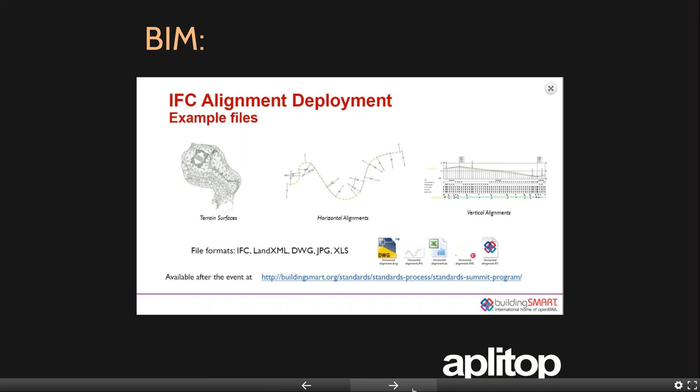What are our current research areas? We have virtual reality, augmented reality, drones, RPS, or BIM for infrastructure, like I told you before.

This is some national reference. Of course, we work with the biggest contractors in Spain, like Sacyr or Dragados and companies like that. Also with universities, the most known universities about surveying engineering.

At the international reference level, we have the underground of New York, the underground of Riyadh. Pan-American is a road that will cross from north to south, all of America. Actually, we are doing Chile and Colombia, the road with tunnel and all these things. Several worldwide projects give us a nice background.

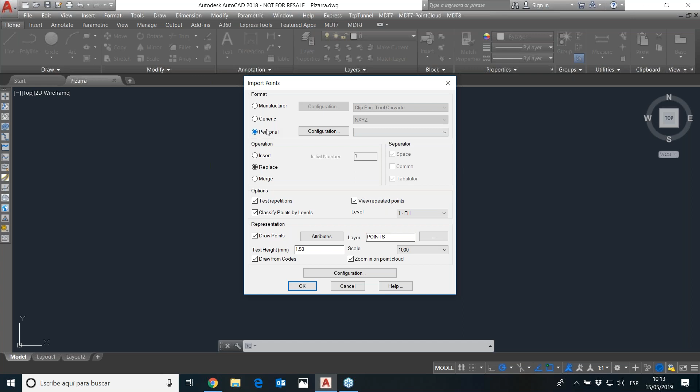So you have several possibilities to import points. You can choose by manufacturer. You can import from Clip, from LandXML, from LAS, from S3, a lot of possibilities. You can make your own personalization about importing points. On our side, for this demonstration, we will do it generically in XYZ for the importation. In some places and different countries, there are several possibilities to change the coordinate system.

Another thing we're going to check: in APLITOP, we don't have any codification established, which is an advantage or not depending on the case. So the first step is to create your own database codification. This way, when you import your points, you will automatically get break lines or representations of trees and this kind of things.

Why is it like that in APLITOP? Because our software is used internationally, the main advantage is you create your own database, and if you travel abroad, you can import it for a local government kind of representation.

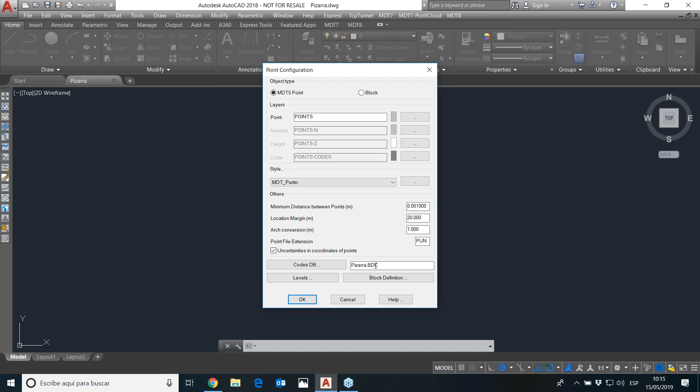So here my codification is for Pizarra. Okay, cancel, I'm going to change the scales, and another important thing is I'm going to draw from the codes that I have taken in the field.

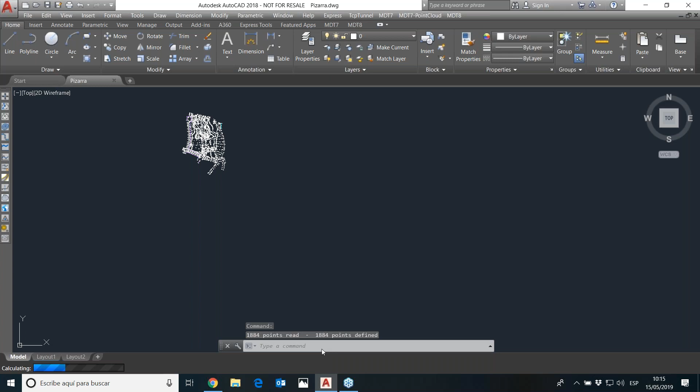I select my text file, and the software is importing all the information of this urbanization. My computer is a laptop, quite old, and I believe it's full. I need to clean it, I was thinking to have time this morning to do it, but it seems quite slow today.

Normally, the software has a really strong and quick calculation process, this is one minute normally, or less. I'm hearing some noise, I don't know why, on the back. Okay, let's close that down.

Brandusa, are you here?

I need to check if I don't have a virus or something like that, because normally it's not calculating this slowly, it's really fast. Okay, so as you can see, we have imported.

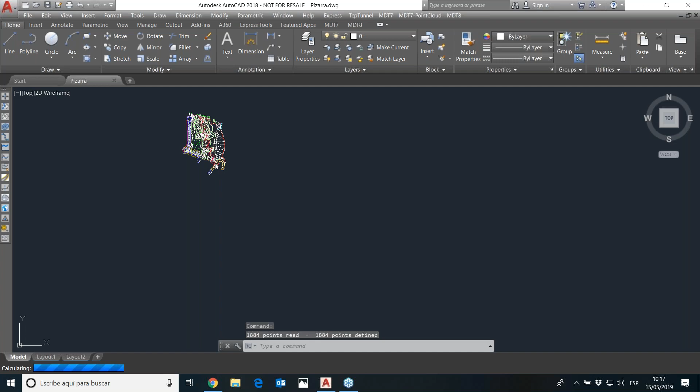1,884 points imported, and all the points have been created with their own codification. As you can see, break lines have also been defined due to the codification, and the software proceeded automatically.

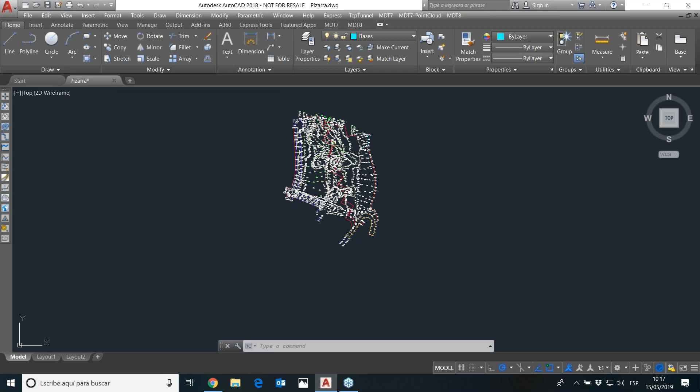So for example, if we go to MDT7 vision, apply, and here you see all the codes. You see, this is to define, and it defines automatically the break lines, when you have been in the field taking your points. These 'árboles' mean tree in Spanish.

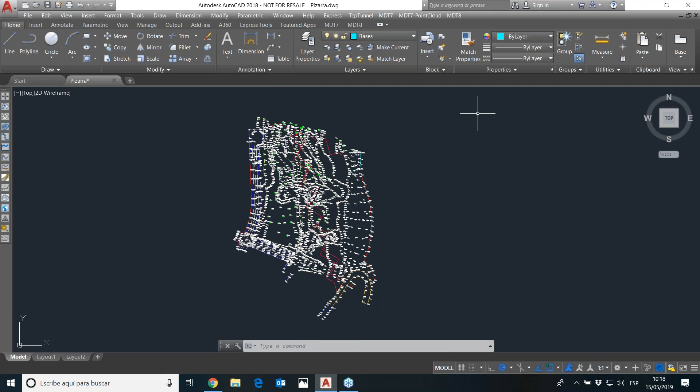So here you can see the points taken in the urbanization where we want to create parcels, and where we want to create a road in order to prepare this urbanization. The first thing we are going to proceed with, since we have all the points, is to create the surface.

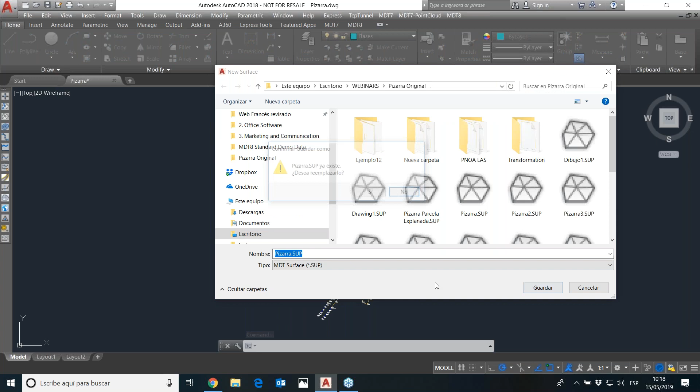It's really easy, we go to surface, create surface, and we choose the triangulation we want. So Pizarra is my superficie, and I'm going to choose the layers that I want to use for my triangulation.

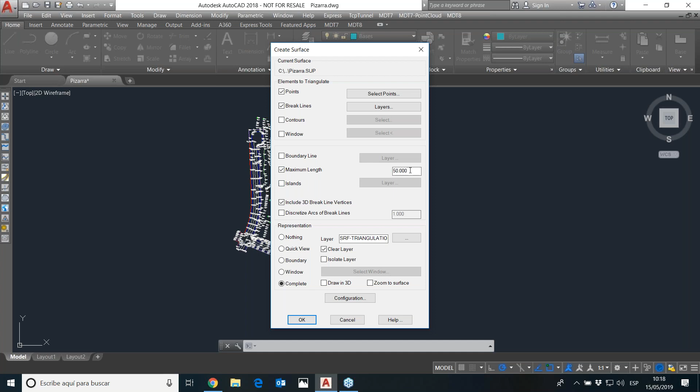I have already prepared this for the webinar, so this is what I want to proceed with for the triangulation. You can select what you want, and you can create islands, and my maximum length, in order to avoid a big triangulation, will be 50 meters. Okay, let's go.

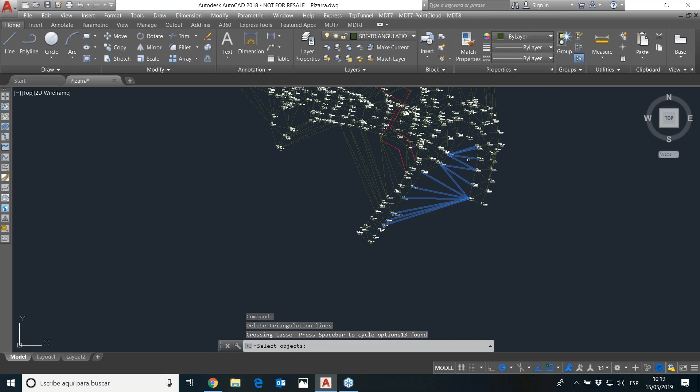So already we get the triangulation, you see that, and for example, there are parts that we don't like. There are several tools in surfaces in order to delete lines, for example, or this kind of thing. So I'm going to delete a line. There are a lot of really interesting tools.

To analyze how the terrain is, for example, we can make a quick profile to have a quick look at how the superficie is, and we get the quick profile. We can change the vertical factor, we can import, we can save, there are several things possible.

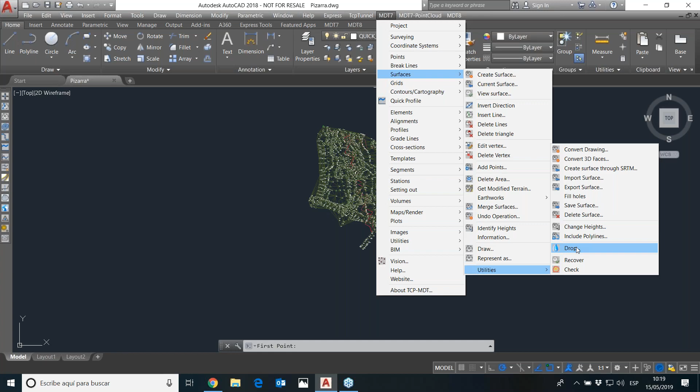We also have tools like in surface utilities, 'drop', in order to analyze where the water will go up to the end of the superficie. So for example, I want to know from this point, the starting point, where the water goes across the superficie. For example, from this point, and the same here.

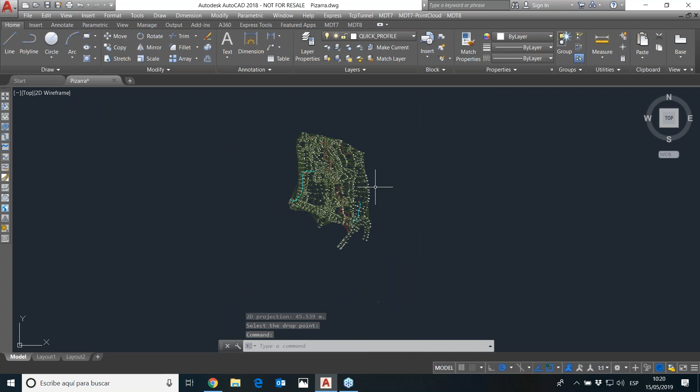Since we have done an analysis of our superficie, the second step we can do is the contours, so we can manage contours. Minor, 5, perfect, so I proceed and we get all the contours of the superficie.

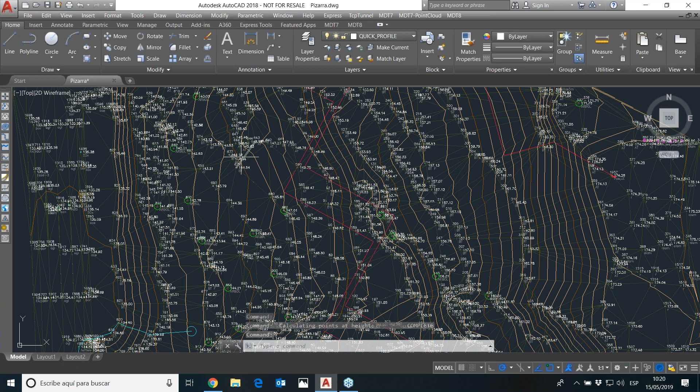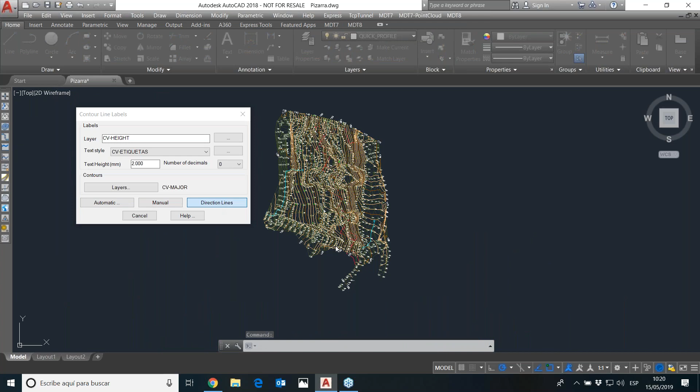We can also make the automatic coding. We have several functions for labeling the contours. We can proceed automatically, which gives us a code all around our superficie. We can also do it manually, labeling by choosing a point to get a code, or by direction line, meaning inside the superficie we select a direction and it gives a code inside the superficie.

As there is a lot of information, I'm going to hide some of the display, for example hide the codes, and hide the points too. Like this, it will be easier to appreciate... I made a mistake.

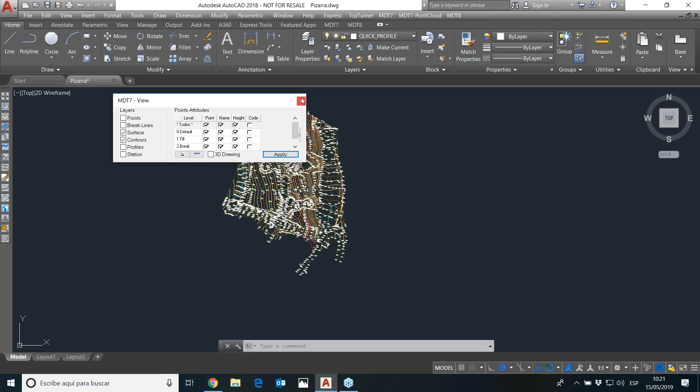Okay, like this we can identify better. We have the surface, we have all the points, we have all the information. So maybe the next step will be to make our excavation.

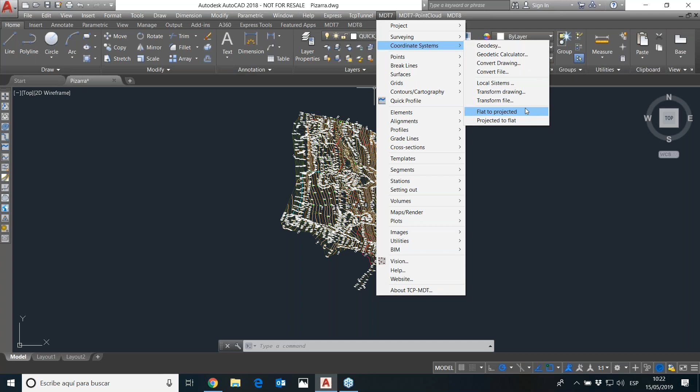I just want to make some precision. Surveying modules - this is for when you have to make observations with a total station, make traverses, or create a network when you have two different points with your total station. We also have a coordinate system with a geodetic calculator to convert datum from another datum. We have several tools really important for surveying when you have taken a lot of information with your total station.

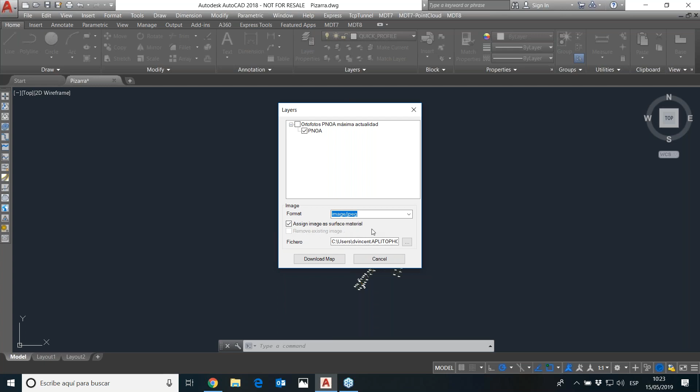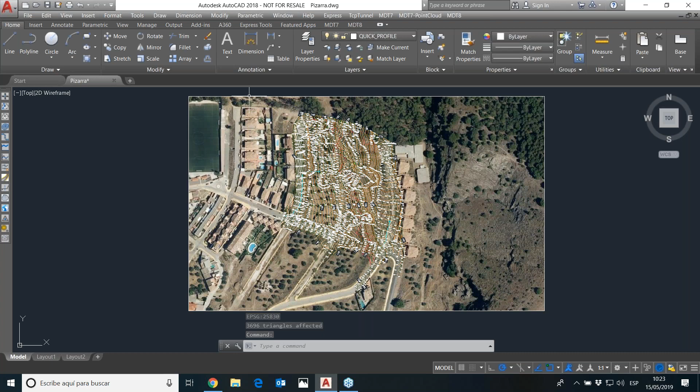So you see, this is the first urbanization we have. All the points taken in the terrain match reality, and here we have the second part of the urbanization. What we want to do is create a parcel for the construction of one house and make a road to prepare all these big parcels for creating new houses.

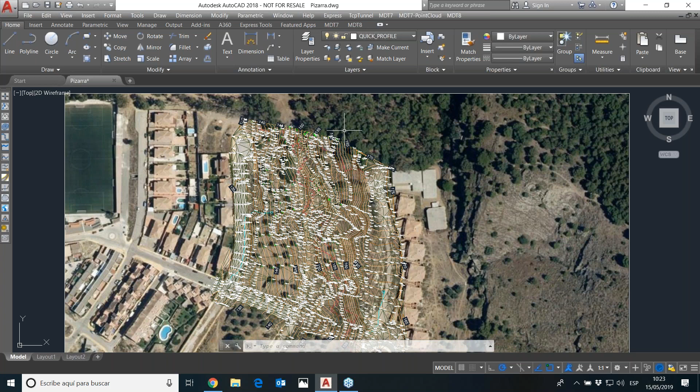Okay, so I'm going to remove it because otherwise it won't work. I need to check what's happening because I don't want to have this. Okay, now it's good.

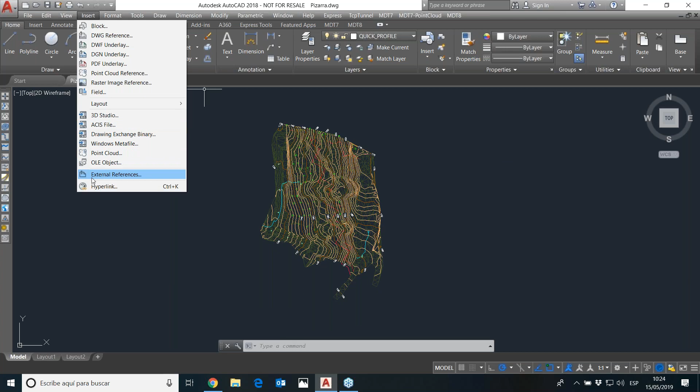So I'm going to use some tools from AutoCAD, and I have already prepared parcels for the construction of one house. I have to attach a PDF, attach a DWG, and make my parcels. This is my parcel. I'm going to open it. Okay, I believe it's okay.

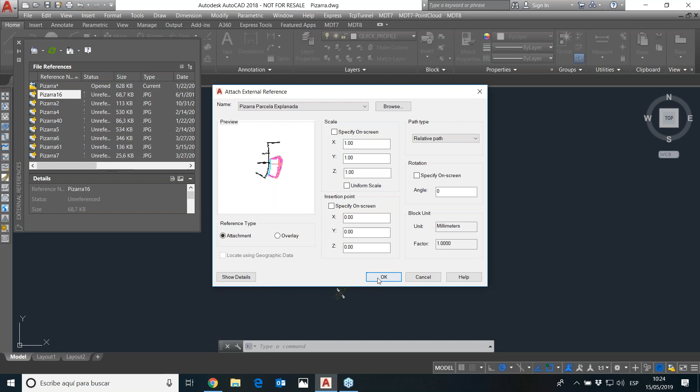I'm going to close that point. As you can see, we have a parcel that has been created in this part. This is another layer where you have these parcels - we want to remove all the ground in order to make the construction of one house afterward.

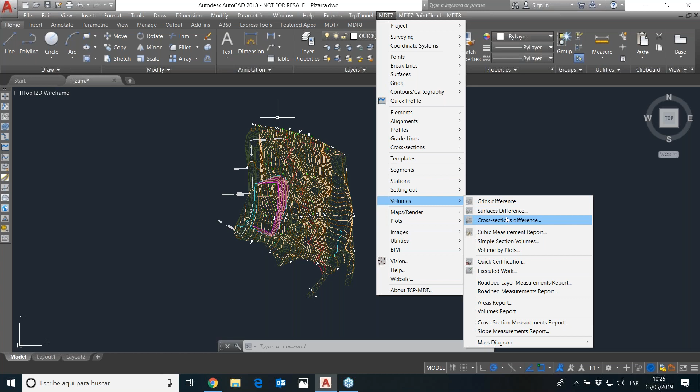So what would be most important is how we can make a volume calculation. I go to MDT, I go to volumes, and I can make a report by surface differences, for example. Let's try if this one works.

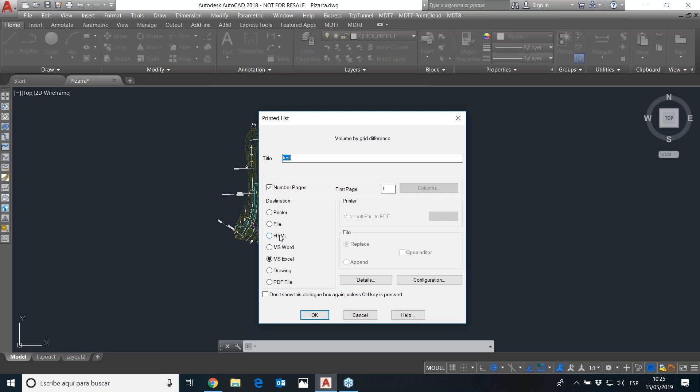So I select my natural terrain, and I take the other surface with the parcels. Here I get directly, by grid difference, the cut volume, the fill volume, the difference, and all these things. I can print it in several formats - HTML, Excel, a lot of things. You can modify this Excel if you need.

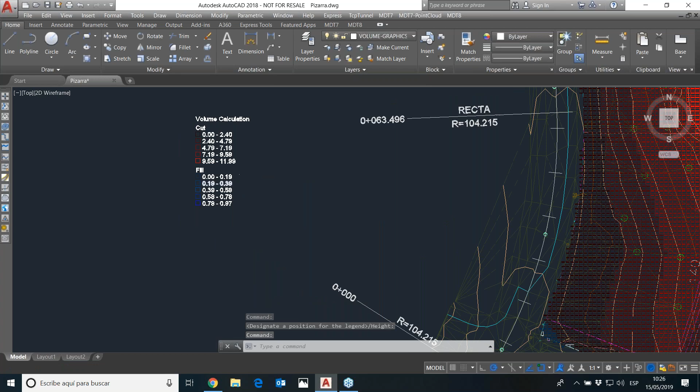We are going to check draw volumes and height difference. So the software marks each point, and now let's do the legend. As you can see here, you have the volume calculation with cut and fill volume, and inside each cell you can find the color about whether it is fill or cut volume. So this is one thing that you can manage.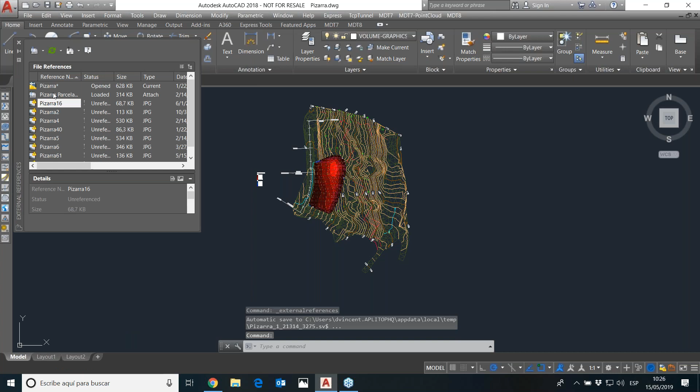Also, we are just checking about the standard versions. Okay, let's continue. I'm going to remove these parcels, or we can continue - I don't know. I'm going to remove it because it will be easier to understand what follows. Okay, so this one, I want to remove it.

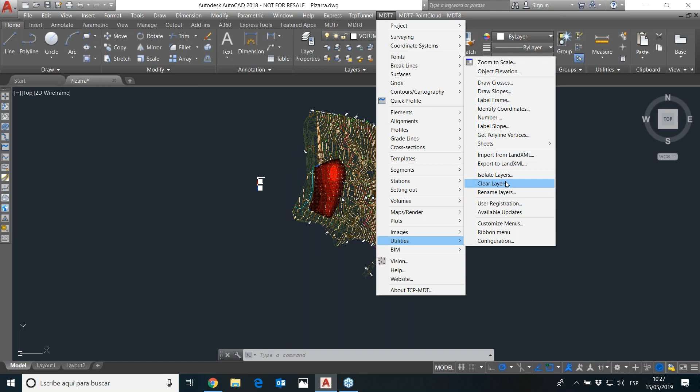Detach. Okay, and now I'm going to clean the layers - MDT7, utilities, clear layers - and remove all the volumes. So I need to select from volume all the volumes I've been creating, shift here, put it here. Like this I have a better view.

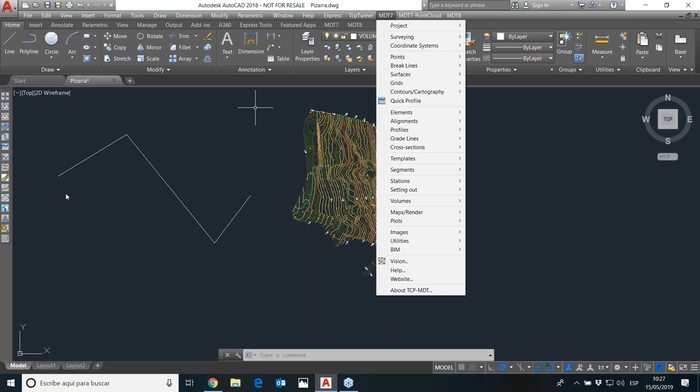Now the other thing I'm going to do is import an alignment. It's really easy to create an alignment in MDT - you just take a polyline, create it however you want, and by MDT7 alignment, convert polyline to alignment. Because I wanted to have something really nice, I have already prepared an alignment.

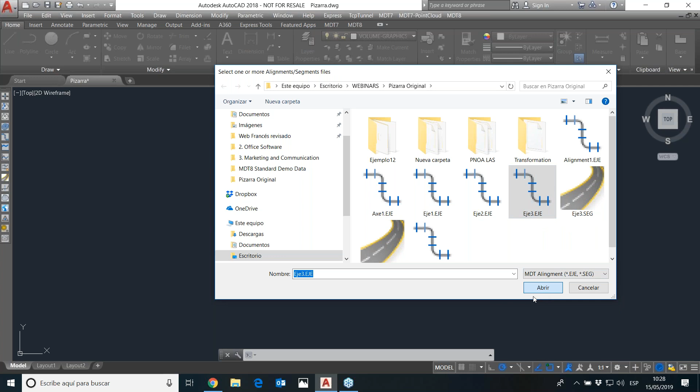So in this case, what I'm going to do is go into alignment and import alignment. We can import alignment from Land XML, for example - you can export from Civil 3D to Land XML and then import it into MDT this way. So this alignment is already done perfectly - the clothoids are nicely defined in order to have a great alignment to draw a road into this urbanization. We will check it after that.

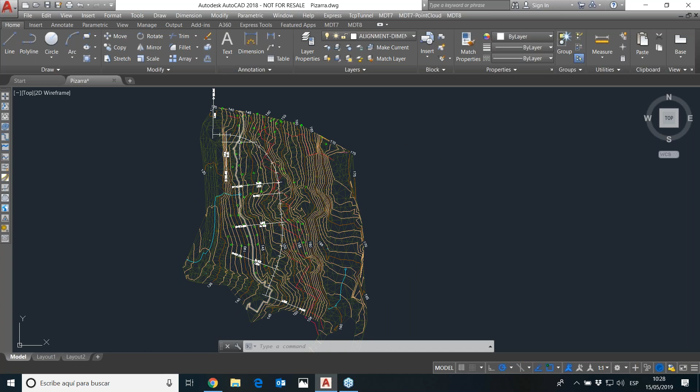So once we have the alignment, we can start to do the typical things for surveyors, like getting a profile - profile, get profile, really easy.

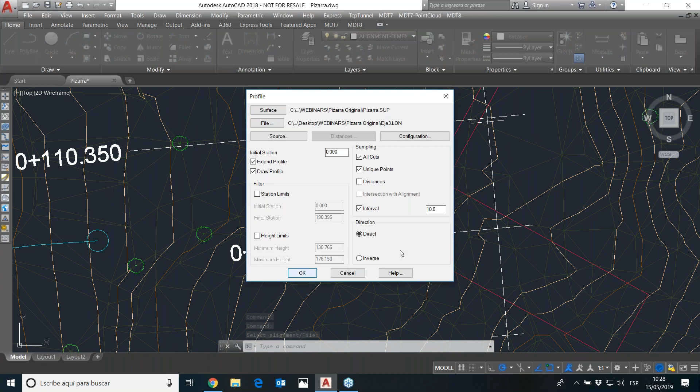I select my alignment, okay, and we go to the alignment.

And very quickly, we get the representation of the alignment. Well, normally it's very quick, but today, oh, okay. So here I need to precise a lot of things.

This is the typical representation for Spain, but in MDT7, if you go to configuration, utilities, configuration, you can define your alignment by Spain, by several countries.

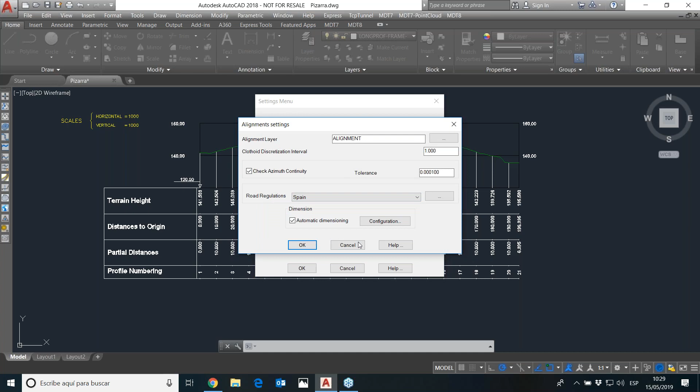If for Romania this kind of profile is not well, just send us an example and we will implement an automatic representation for your profile and your cross-section easily. Actually, we have already some clients in Romania, but they never share this information. So I believe the representation of the profile is the same.

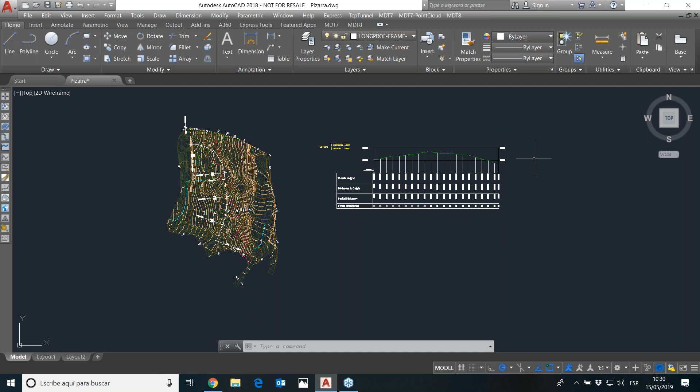Okay, so since we have got the profile, we can go, for example, to the cross section. Same procedure: we select the alignment, so we go to the alignment, very easy step. We set on the left 20, we can change to 50, to 30, whatever we want.

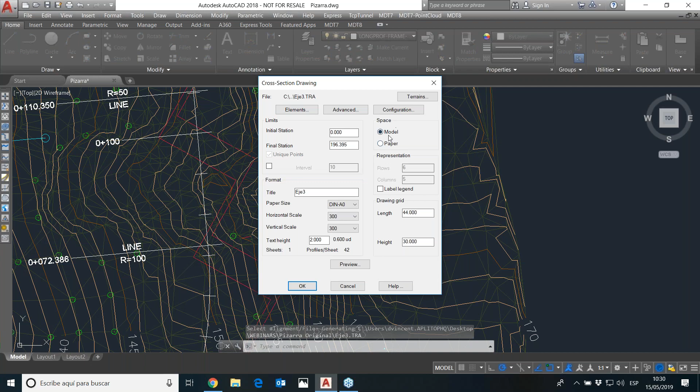Okay, let's go to continue. I'm gonna do it in the model, not in the paper, and this time I'm gonna make a new kind of representation. That it is really important.

And here I can draw all the cross sections. Okay, let me check what's happening. So here you have a paper space that is not defined, but if you do it, you can keep it in your computer. It doesn't take any space, and when you create your project with all your profiles, it will appear already with your name, your company details, with the project, and you only have to create this one time. After that, it's all automatic, and it is really, really nice.

Okay, so I don't even have the blue bar to say that the software is working. This is a strange thing. So I believe my computer has some trouble. I will check after that, because normally it's really, really fast. It's just been a couple of days that my computer is getting very slow, and I don't know why.

So here we have defined all the profiles or all the cross sections. This also can be imported into a layout in order to be easily printed. There are a lot of functions that I will not explain, just to have an overlook about all the features of the software for this issue.

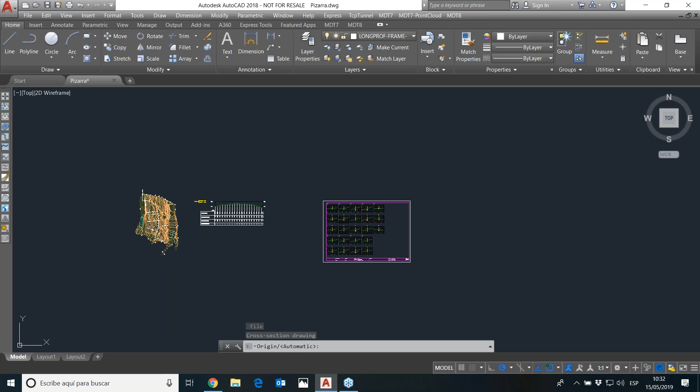Okay, let's go, it's a little bit long. I believe I'm gonna remove part of this demonstration because my software is going so slow, my computer is going so slow.

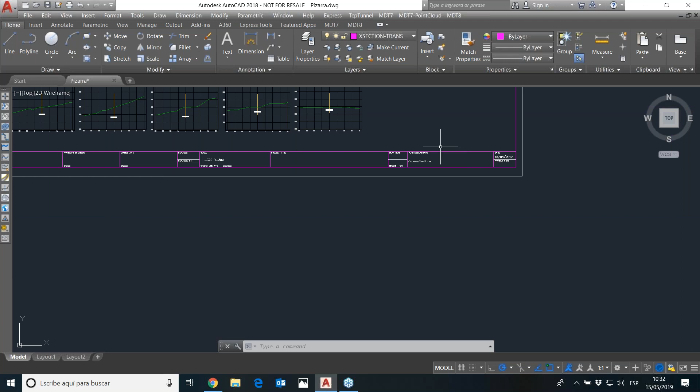Okay, so here each profile, we see the profiles by PK. And as I told you, all these commands, all this information can be filled automatically. You just have to do it one time, and after that it will be easy to implement.

Okay, so from now you have seen all the functions about the standard version. From this moment, all the features that I'm gonna show you are in the professional part. So let's continue, and let me explain why the software has several great advantages. How does the professional version work?

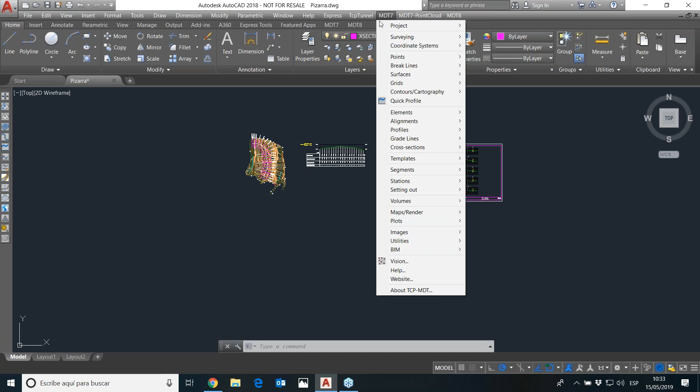In APLITOP we have created a function that it's called segment. Okay, let's open it. What is the segment? The segment is all the features that define your road project.

What does that mean? In the segment, you can import your alignment, you can import your profile, you can import your cross-section, you can import your grade line. I won't show you how to create a grade line, but it's really easy also - it's just drawing a polyline and applying it like a grade line.

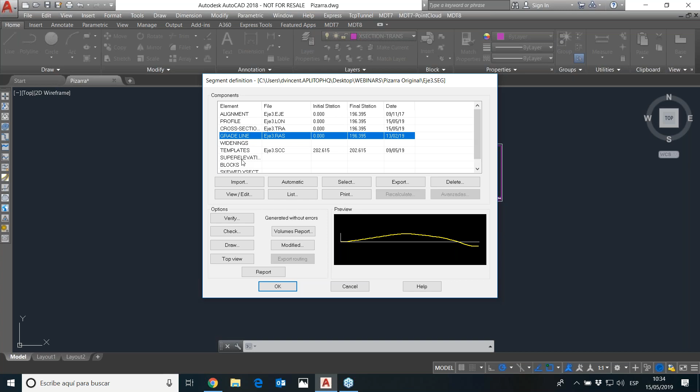The templates - let's have a look about templates. View edit. Okay, so the template is all about the road. Inside you can create the platform, just adding your platform about how you want to do it, drawing it.

You can create your road beds in each part of the road as you want, your ditches, your cut, your fill, and also all the commands are defined in here - the saving, the wall structure, the geology. In geology, you have a different kind of shape.

Did you shut down your microphone? I don't know what's happening. I heard a lot of noisy voice in the back. Okay.

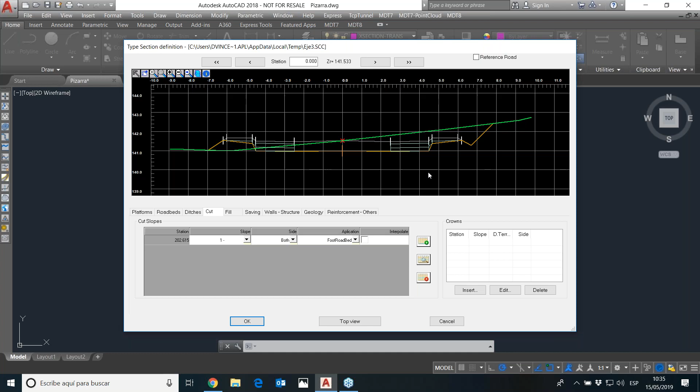Okay, so this is all the things about our road project, how to define it. The main advantage of all these things is a segment doesn't take any space on your computer. You can keep your segment. This is a really high advantage, because when you have a road project in the same place and want to reuse the same feature of the first road you have defined, you can take it easily, all the things you have been creating, and just modify several points. Okay, so this is a winning time, really, really important.

When you have defined all your road project with all the things you wanted for this issue, there are several commands that we can have a look at. For example, verify. The verify function is about...

Just give me 1 second. Hello, do you? I don't know what's happening.

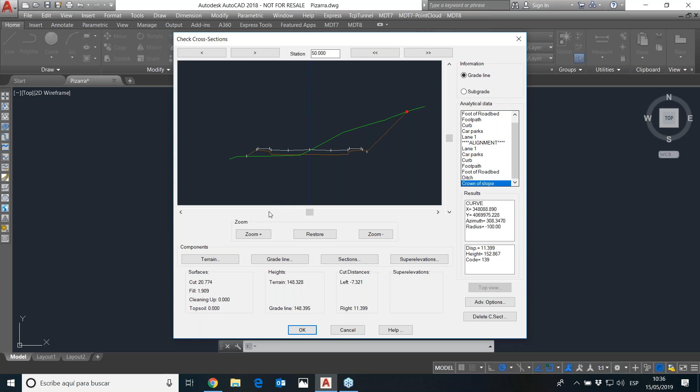So the road project is defined, generated, to generate a road without dead angle and to check that the road has been defined well into the norms. We can have a check. You can check, for example, the foot of road beds, and you can check it by the several piquets that we have, and make some eventual modification about all these things. Or the crown of slope or different points.

We can draw, but this takes some time because my computer is not very well, but you can draw it, everything about your profile with the road included. I'm not going to do it, because if you check other webinars, you will see how fast it is. But today is not the best moment for me to draw these things.

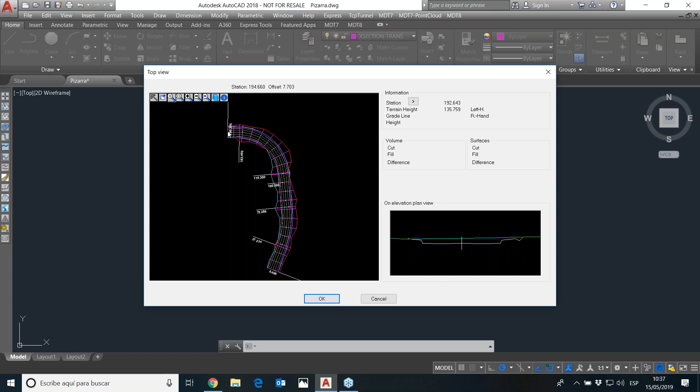We can make a top view. So this is just about the road. You can check the road, all the points, how it is in each part of what we have been creating.

We can create a volume report. This is really important. Calculation method, we are going to take average area. And here, depending on the templates about the segment you have defined, you can find all the definitions. So for example, in topsoil, if we have create ground or vegetable or vegetal or this kind of things, you can have all the definition. And here you have the cut volume, the fill volume, the topsoil volume, the difference, all the information.

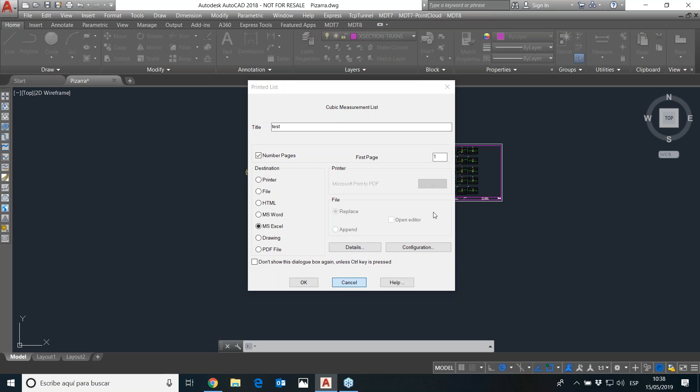This can be printed in Word, in Excel, in drawing, in PDF, if you want to make some change. So this is really nice. Here you have several functions to do it quickly, to draw it, a lot of possibilities.

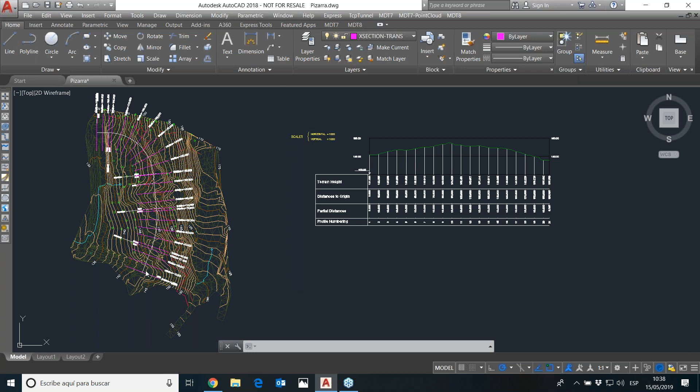Okay, and since we are agreed with our road project, we can tell the software: now you can modify my natural terrain. So we are going to proceed to the new triangulation of this natural terrain with the road project we have been defining. As you can see, the software is making a new triangulation.

Here we see how it starts. As I said, today is quite slow. Here is the blue line going step by step. And we see how the software proceeds to the new triangulation of the road into the natural terrain.

So this is the part about the professional version, to be able to modify natural terrain, to create your road, or this kind of things, this kind of features.

This software doesn't require too much things. I'm going to show you in the following the principal features that the software needs. Maybe I have it here. Just give me 1 second.

Products. Let's have a look at the professional version, for example. And come back to the AutoCAD.

Wow, everything's so slow. I don't know what's happening.

Okay, and maybe here we can have a look about the features. No, I don't have it here. Okay, so let's continue the demonstration.

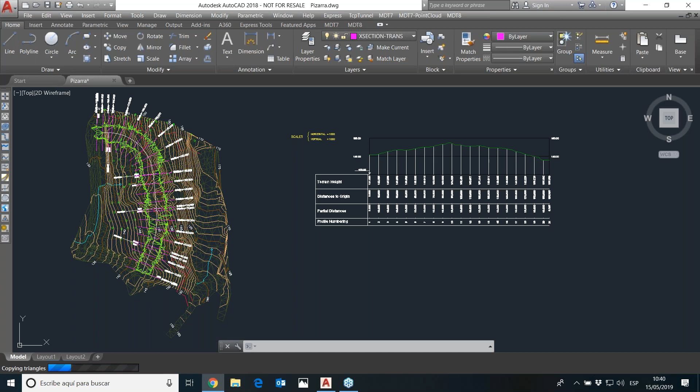And we have several tools that I showed you before to check if the road is well done. We can make quick profiles and these kind of things.

Still finishing the triangulation, it seems. Just give me 1 second. I have to check what's happening.

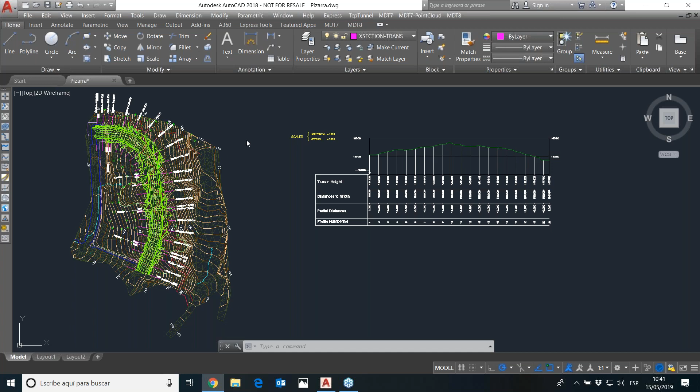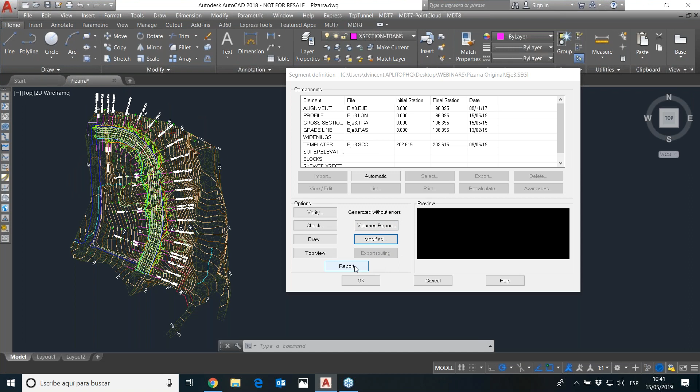Okay, let's start again. So here we have defined everything. We can create a report with all the parts and all these things. I'm going quicker.

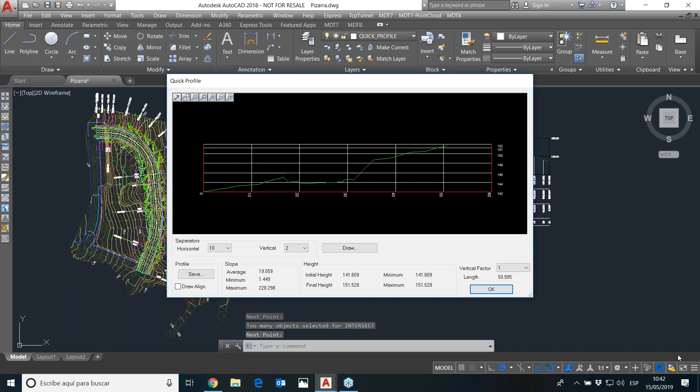So now we have defined our road project and we have several tools which are really, really nice. Firstly, let's make a quick profile. You see that the road has been defined here, so there is no problem. If we apply, we can have a look about this part.

If we want to do things very well, we can make the contours again. New contours, including these surfaces and with the road project. So all the contours now are defined, integrating the road.

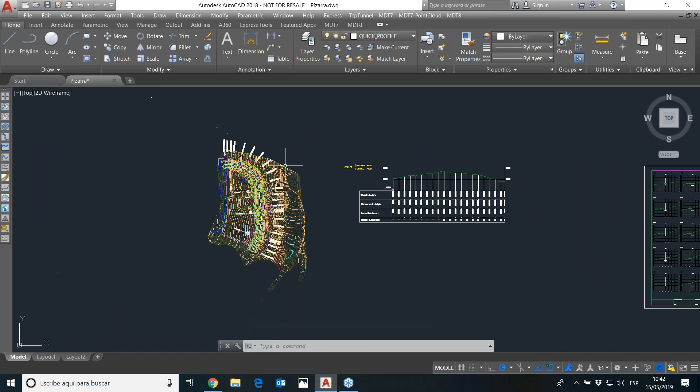We can export this road project. I'm going to select the layers about what I want to export. For that, I have already prepared something about this issue. It's Pizarra Google, okay? And I want to export all these points.

This is going to generate a KML file, so I keep it, yes. I forgot to open Google Earth in the beginning, but the software will automatically ask if you want to open the file. I say yes.

And now the software will ask Google Earth to open it, and you will find automatically how the software will show you all the triangulation and all the things we have been doing about the road into the urbanization in the village of Pizarra.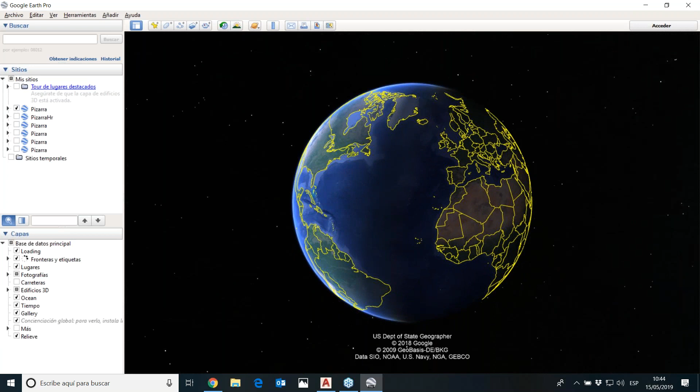So it's going automatically to Spain, the south of Spain, where we are based. And here you can see the surfaces and all the things that we have been implementing into this village. This is the village of Pizarra, and this is the urbanization first step, second step, and now what we want to do is making all these parts.

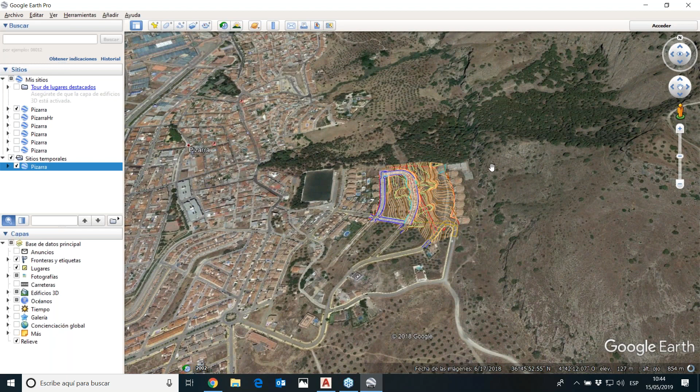So we created parcels before, and now we have created this road here. So this is a possibility to connect with your clients and share the projects you have been creating, exporting by Google Earth, and say to your final clients, have a look on Google Earth, this is how the project looks.

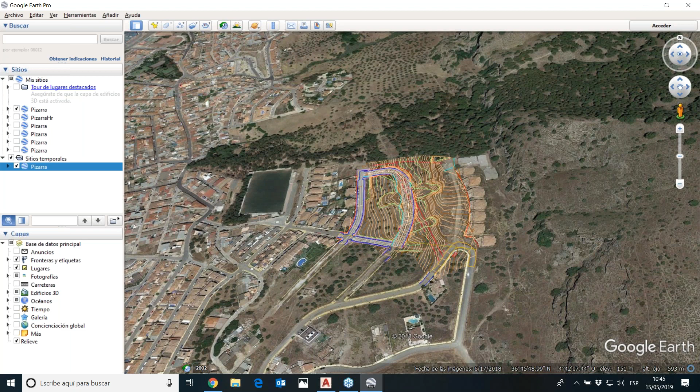And the second part is about MDT7 map renders route by highway. You remember when I downloaded the orthophoto from web map services, I have access to the materials. I have access to the surface as a material. So here you will understand why.

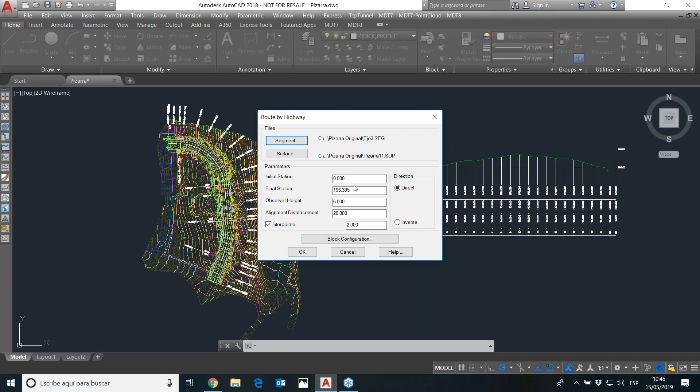This is to create a realistic render. If you have been in the field and taken some pictures, by downloading the orthophoto it will apply to the triangulation in order to have a really realistic render.

So this is the viewer, and it's loading the texture of the orthophoto into the triangulation. Here you have the road project. Imagine you have taken a picture on the back - you can have the picture of the place where you have been.

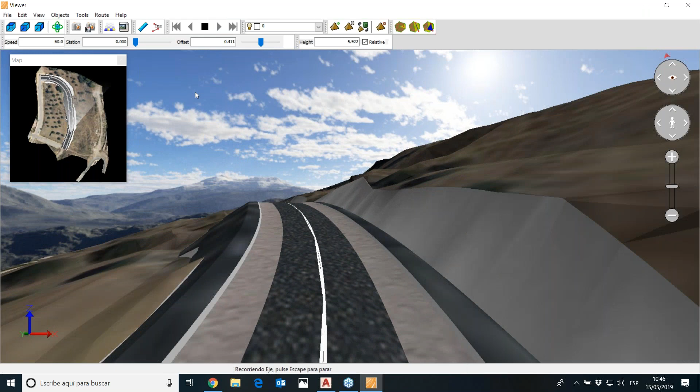And this is one of the nice features - you can create an MP4 or AVI video. Instead of sending a file or drawings that the client cannot understand, you have here the possibility to send the video to your clients so they can check the project you have been doing.

And here is my presentation. I'm really sorry, particularly to you, Brandusa, for not being so well prepared for this demonstration. I hope you have liked it. This software, if you ask around, has a very high valuation because it's really simple to use. As you have seen, it's really easy to find the commands and all these things.

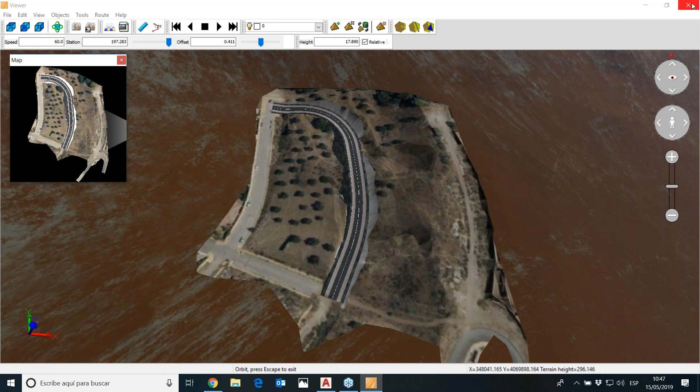So I don't know if you have some questions. I'm able and will be happy to try to reply to all your questions inside the platform. Maybe you can write your question in Romanian, and Brandusa will translate for me.

Okay, thank you, David, for your presentation. I believe there are no questions. No, at this moment, no. Okay, so at the end we have been faster than before. I don't know if you want me to show you more things.